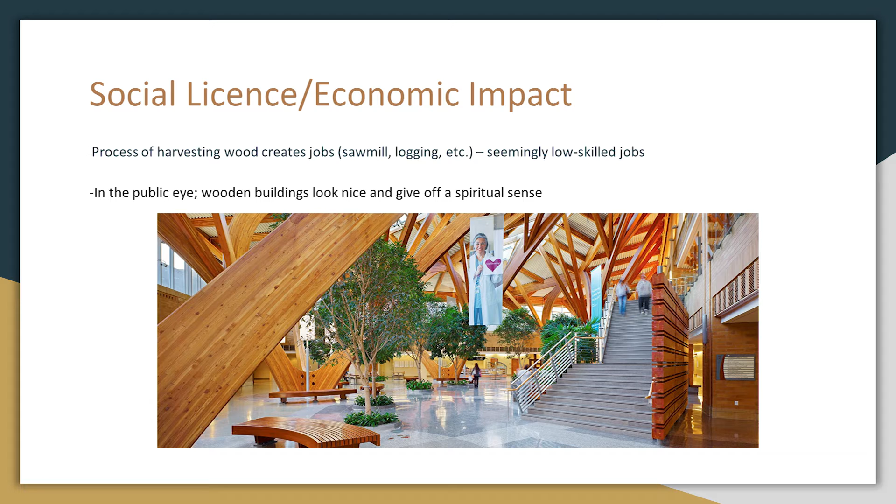Continuing now to engineering. To our previous knowledge, wood wasn't as strong as other materials per volume and isn't allowed to be used in the same way for tall buildings. However, this does not turn out to be true as we thought, because wood is actually of a similar strength to steel pound for pound, and there are numerous large-scale projects that use wood as their primary building element, such as St. David Catholic Elementary School, as discussed in the Knowit presentation, being a massive one-story wood frame structure.

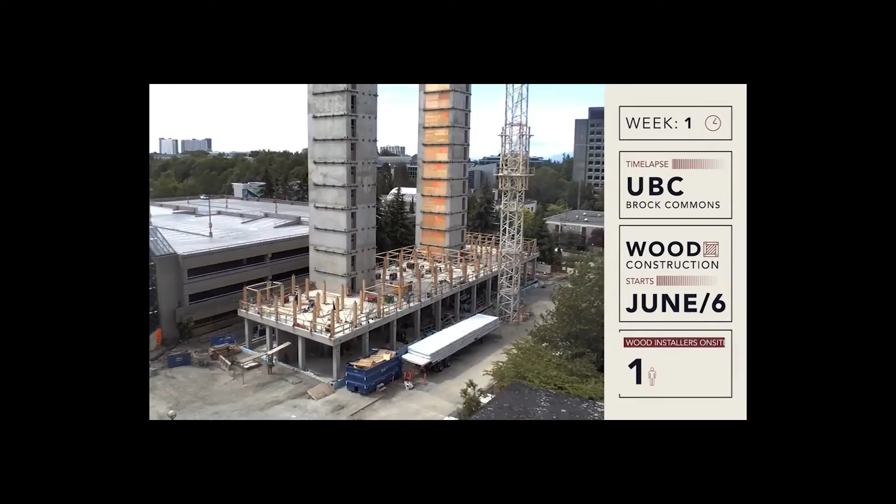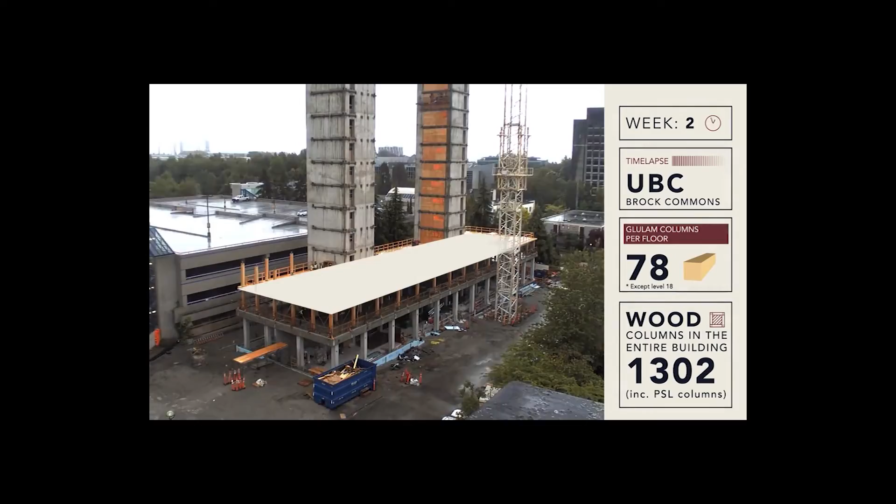The video that's currently being played in the background is of the Brock Commons student housing in British Columbia, a massive 18-story timber residence structure that has a capacity for over 400 students. It is a testament to the capability and sheer strength of wood, as well as the advancements of those who built and designed it.

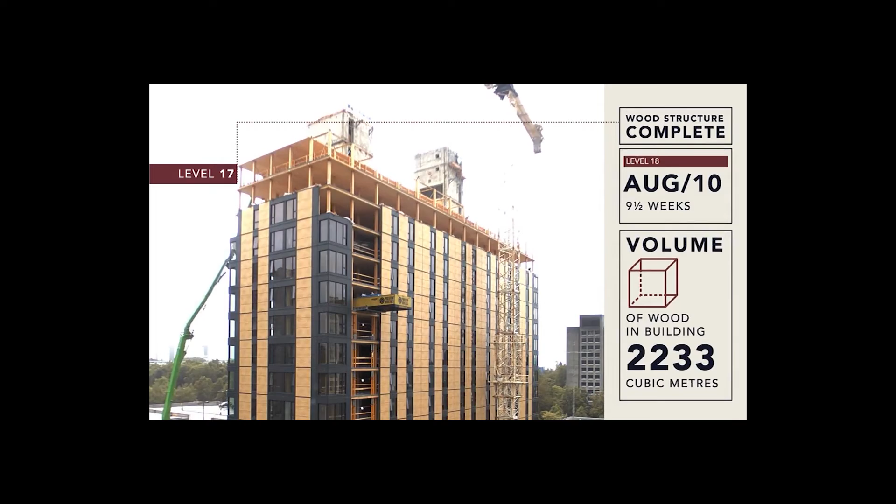Termites and other insects will attack wood. Wood is more resistant to environmental factors than we initially thought because wood can be treated with various chemicals to help prevent warping, buckling, bowing, etc. The treatment of wood can also counter termites and other pests. However, the trade-off is that those chemicals used can have negative environmental consequences, especially if they're not disposed of properly.

Wood burns. Wood burns, yeah. However, it performs better in fire than one might think. As previously mentioned, wood can be treated with various chemicals that can improve the overall fire rating. In some cases, charring of the wood can also be used to help prevent fires as well as making it harder to set alight and burn. Moreover, there are anti-fire systems in place, such as sprinklers, fire extinguishers, etc., that can help slow and prevent a fire before it gets out of hand.

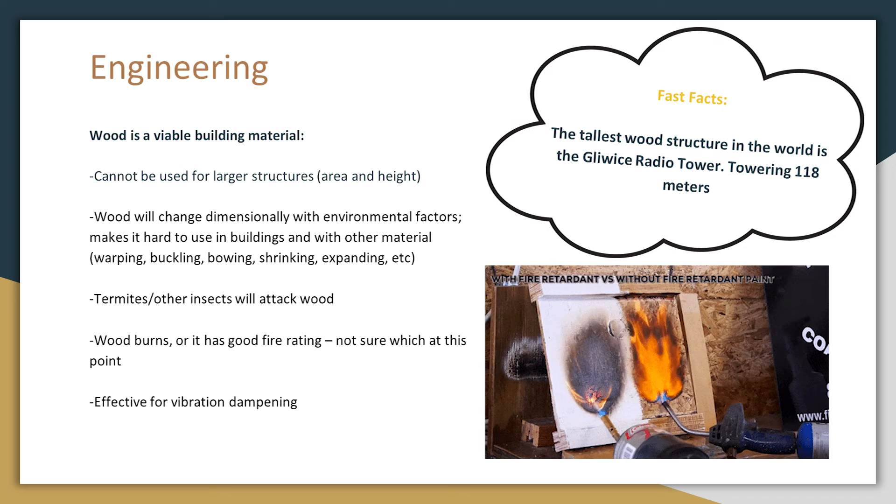Now we'll address: trees are slow to regrow, we are running out of trees. While trees do regrow slowly, they are renewable, whereas other resources for building aren't. Andre Morneau confirmed our initial suspicions that we are not running out of trees. Forestry in Ontario is being handled very well. There is no clear cutting, and the environment is being taken into account with what trees are being left and replanted. The time of regrowth also doesn't matter as long as trees are being cut and replaced in measured sections.

This forms cycles where one area has fully regrown trees, ready to be cut, while others are growing. Sections will be ready to be cut in time because of the sheer volume of trees. Forests can be continuously sustainably cut in this sectioned way so long as the demand doesn't rise too high.

Now we'll address the conception: to be useful outdoors, wood must be treated with chemicals. This is harmful to the environment. We already talked about wood rotting and its susceptibility to insects being higher than other classic building materials, so we'll focus more on the environmental impact. Charring the outer edge of wooden buildings, often in log cabins, can deter rotting and insects, but on average, outdoor wood is treated. The old green CCA pressure treating was bad, but new treatments can be better.

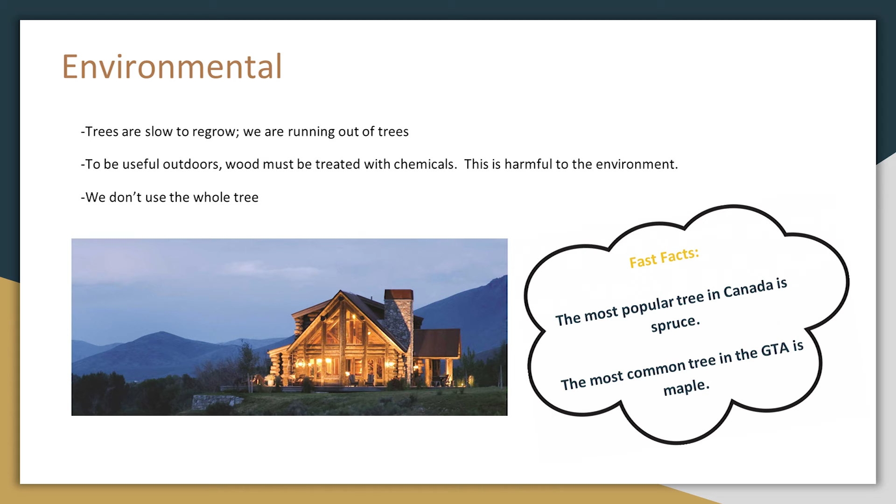I'm gonna continue with the environmental part. As we harvest trees, we are reducing the purification of air. Trees are a carbon sink. As we harvest trees, we are decreasing the capability of the carbon sink, thereby increasing global warming. Trees being cut down doesn't release the carbon. It locks it into goods to be used as furniture or structural components.

Dave Smith talked about how Canada has the third most forest of any country in the world, and they are being sustainably harvested. Because these forests are being replanted sustainably, trees are being replaced to become new carbon sinks. The cycle of forestry actually ends up helping reduce the carbon in the environment.

Renewability is reliant on the environment. One little bug can destroy a whole forest if it's planted as a monoculture. This is why exclusively species farming and replanting in a non-biodiverse way is poor practice. But as previously talked about, Ontario logging is managed generally quite well. Even considering those risks, problematic renewability is better than the zero renewability of concrete and steel, making wood's renewability one of the strongest draws.

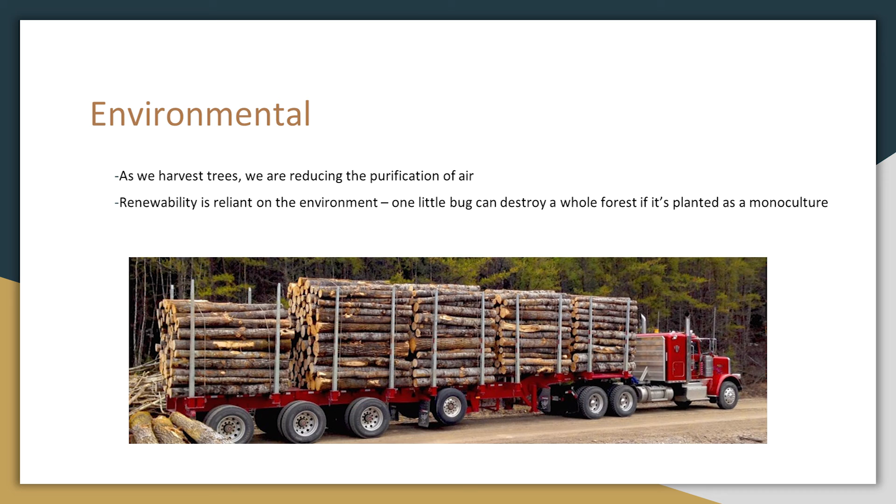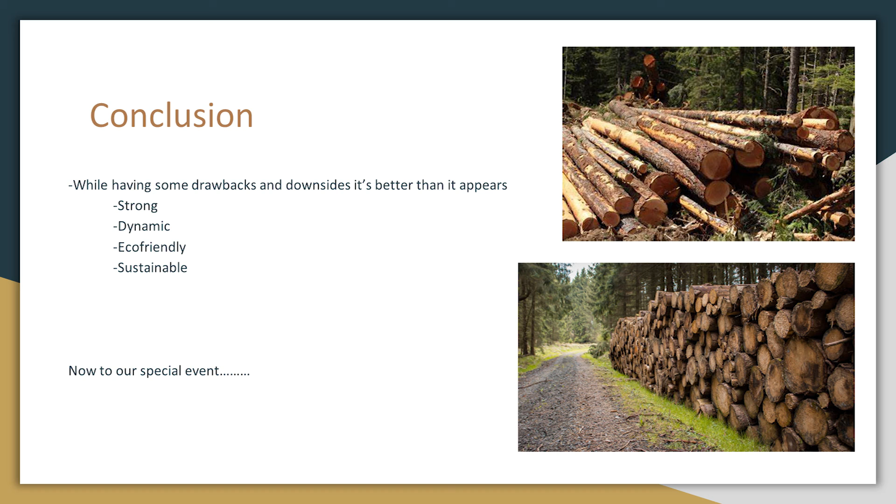In conclusion, wood, while having some drawbacks, is a more reliable and advantageous product than first perceived. Wood is strong, having a comparable pound-for-pound strength as steel. It's dynamic, being applicable to projects big and small. Renewable and eco-friendly, making it a sustainable resource for future generations to come.